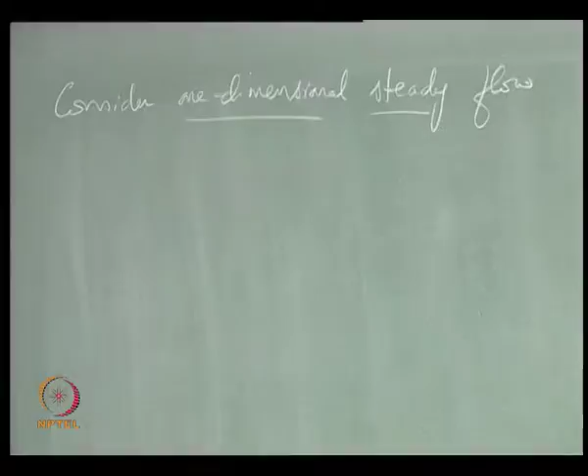So we are doing two simplifications here. One is, first of all, we are considering one dimension. The second thing that we are looking at, steady. I would like to point out that for what we are trying to do here, we don't need to make these assumptions. The final result that we are going to get should be valid for a three-dimensional unsteady flow as well. This is just to keep things simple in what we are going to do now.

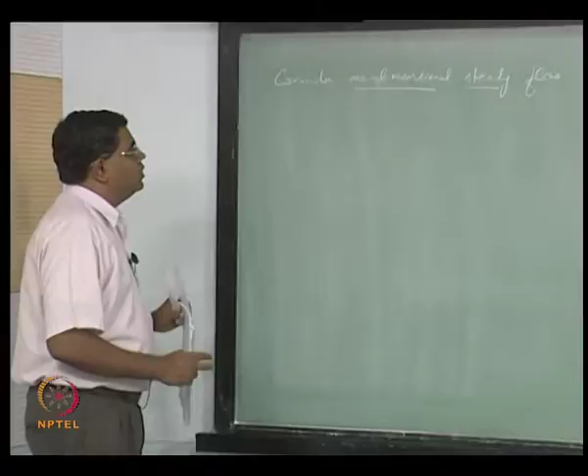What are we going to do now? Recall in what we did up until now, we wrote up the equations of conservation for combustion and found that we had 5n plus 6 equations to solve, and n was like 20, 40, whatever, so correspondingly we had a large number of equations to deal with.

So the question is, is it possible for us to, A, reduce the number of equations, and B, is it possible for us to decouple some of the equations so that it is sufficient to solve only one set of equations for doing something, another set of equations for doing something else, and these are not exactly coupled with each other, except that maybe we get solutions from one and plug into the other.

That means, as far as the second is concerned, the first solution is given to it, we do not have to solve it coupled with it, and as far as the first is concerned, we did not have to worry about the second set of equations at all and just go ahead and solve for this. So this is what is meant by decoupling sets of equations, and we will try to understand what this idea leads to in concrete terms, or in other words what decouples from what and so on at the end of what we are trying to do.

But as I said earlier, from now on all we are going to do is completely go in the direction of simplifying things, and then deal with a few simplified situations from now on. This simplification here, one dimension and steady, is to just make what we are going to do now simple, but at the end of it we are going to come up with some simplification that is valid for multi-dimensional, three-dimensional steady flows, and unsteady flows as well. So let us now look at the simplified situation.

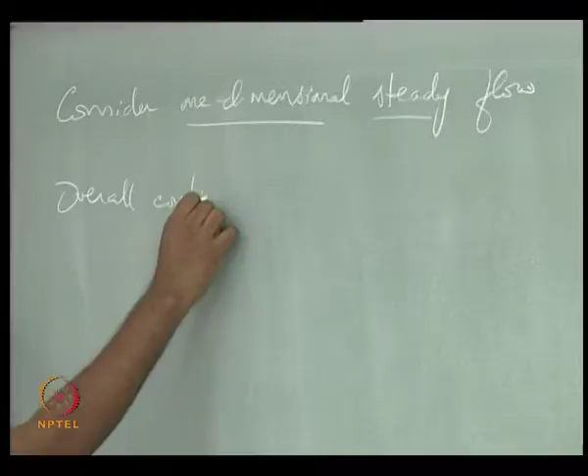If you now have the overall continuity equation, it can be integrated to give. So the overall continuity equation we had was d rho by dt plus divergence of rho v vector is equal to 0. Steady means you do not have a d rho by dt, 1D means we have a d by dx of rho u, and if that is equal to 0 we can integrate that to get rho u is equal to constant.

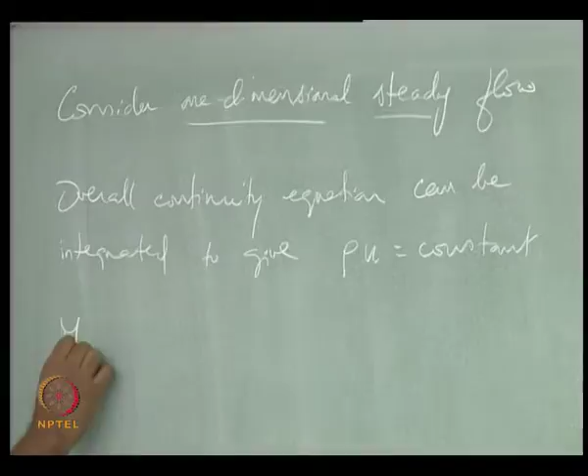So, the momentum equation for 1D steady flow, and let us also neglect body forces.

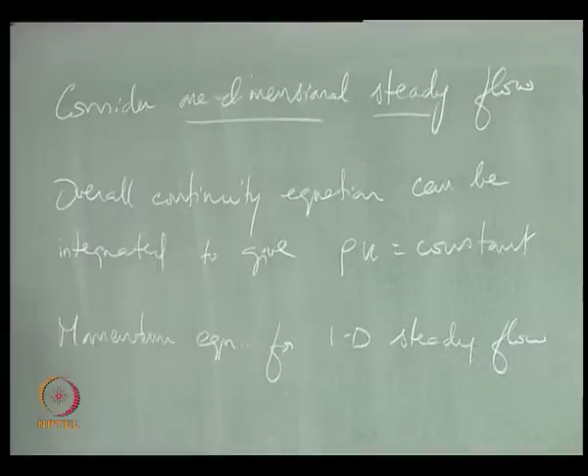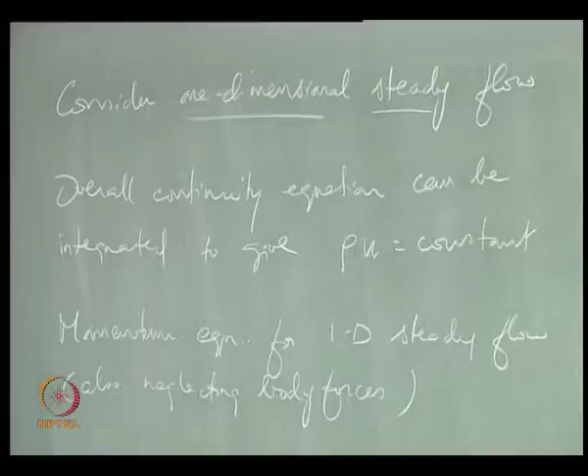Now neglecting body forces means whenever we are actually making these kinds of assumptions that let us neglect this or assume it to be negligible, we have to question it. Is it okay to neglect body forces? In combustion, one of the problems we will find about this is the body force pretty much is the one that is actually giving rise to the shape of the flame as we know it.

So if you now light up a candle, like for example you go for a candlelight dinner party with your date, and then you are trying to enjoy the moment, unfortunately then you start remembering about combustion because you have this flame, and then the entire evening is shattered. So what are you looking at there? You are now looking for a flame that is kind of elongated vertically, assuming that your date is happening in a gravitational field and you are not really going in free space.

So if you were in free space, or a zero gravity environment, you should actually look for a bulb shaped flame, whereas if you now are in a gravitational field you have a buoyancy force that is actually trying to push this flame in an elongated fashion. So the question is, is it okay?

Obviously if you neglected body forces you are not going to get flame shapes that look like anything that we are used to around here on this planet, right?

Well, the answer is maybe all that shape is not really important. For the purpose of burning the candle, it's the heat that is actually being released closest to the candle surface that really matters for melting the wax and getting the liquid to go through the capillary pores of the wick and then vaporizing to feed the flame. So we didn't have to really worry about the outer shape of the flame far away from the wax surface, the candle surface.

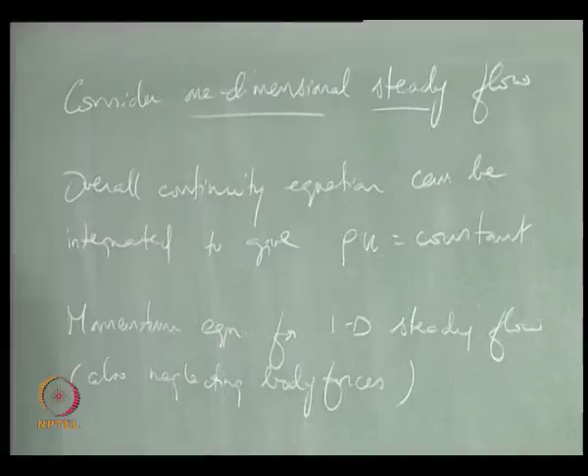So many times what you will find is it is okay to neglect the body force, not a big problem there. So if you now did that, then you get your momentum equation, which looked pretty ominous previously.

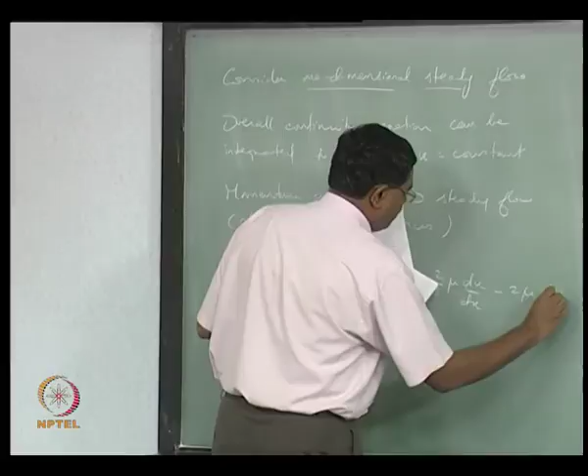It's now going to look like u du by dx equals minus 1 over rho d by dx of p plus 2 over 3 mu du over dx minus 2 mu du over dx.

Well, as we can see from what we have done even in the continuity equation, there is only one direction that we are looking at, the x direction, and we are only looking at one component of velocity, assuming it to survive, which is the x component of velocity, and that's called u.

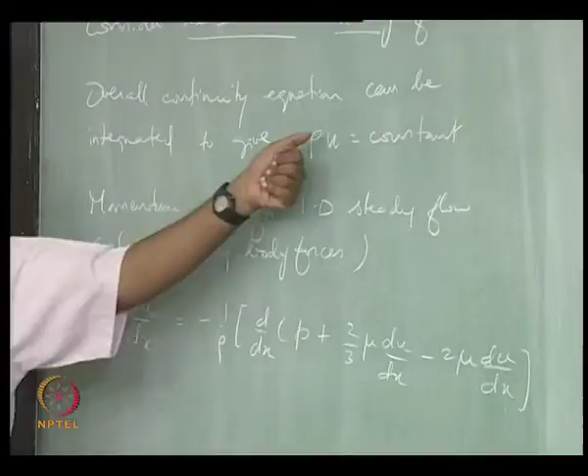And since you're looking at only one direction, it's sufficient for us to actually replace partial derivatives by ordinary derivatives with respect to x. So you have u du by dx, this is coming from the convective term, is equal to minus 1 over rho d by dx of p, that's the pressure gradient term, and then this is the bulk viscosity term, and this is the viscous shear stress term.

So these are the terms that survive. The unsteady term dropped out because we are looking at a steady flow. Pretty much all of the terms are around. Of course the body force has been neglected.

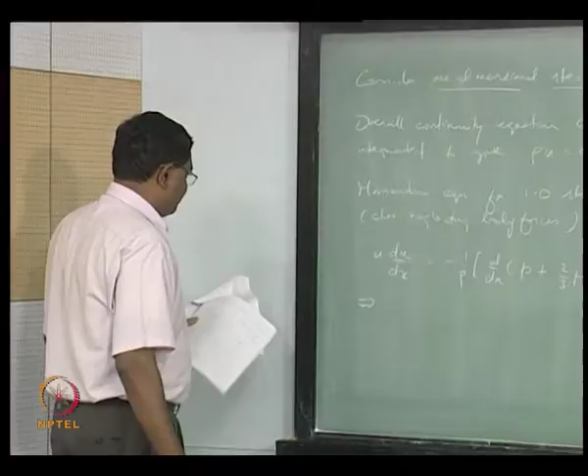So this could now be written as, if you now write this, what would I like to do if it's possible for me to write the whole thing as a derivative. What did we get over here? We had a divergence of rho v is equal to 0 for the vector form.

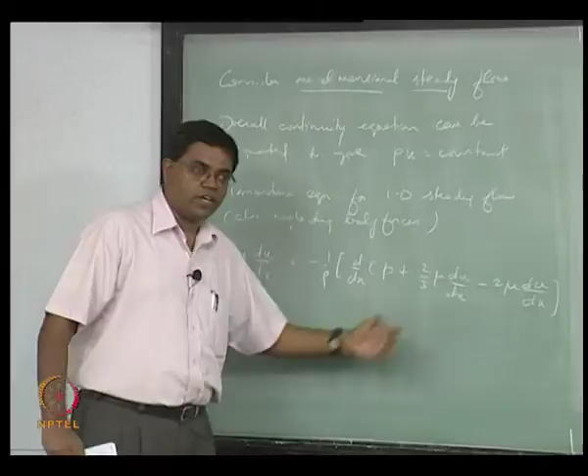In 1D we had d by dx of rho u is equal to 0. So similarly if I can actually get something like d by dx of something equal to 0, I should now be able to say that something is a constant. That's very easy for me to integrate. It becomes like an exact integral for me to evaluate.

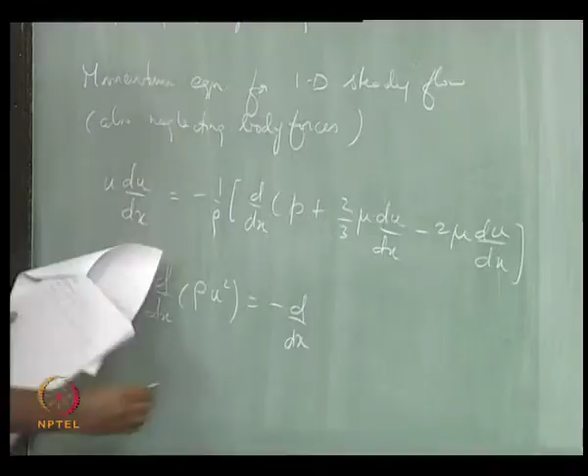Therefore we can now write this as d by dx of rho u, rho u squared, equal to minus d by dx of p plus 2 by 3 mu du over dx minus 2 mu du over dx. How did I get this?

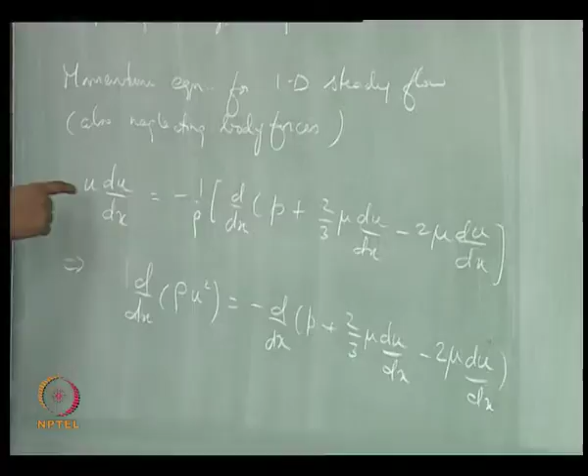Well, first of all I could take this rho to this side, and notice that rho u is equal to constant. So since rho u is equal to constant, I could actually take it inside the derivative, and there is a reason why I got a d by dx of rho u squared.

So what that means is I had a d by dx of this equal to minus d by dx of that, which means I can combine both and have one d by dx. So if I now put everything together and have a d by dx equal to 0, then whatever is inside the d by dx should be equal to a constant, which is now in our case rho u squared plus p minus 4 by 3 mu du by dx equal to a constant.

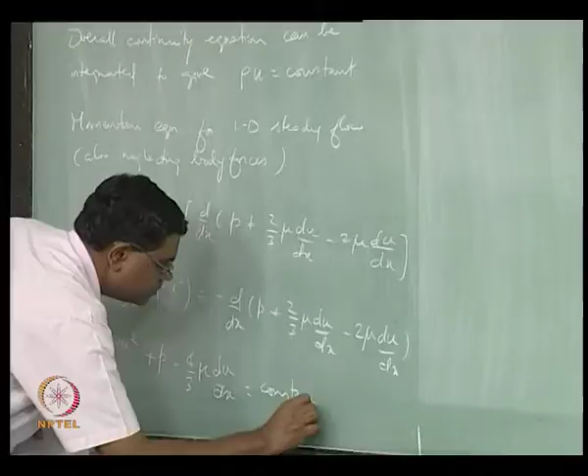Okay, we are now beginning to see things that we are somewhat familiar with from, let's say, gas dynamics.

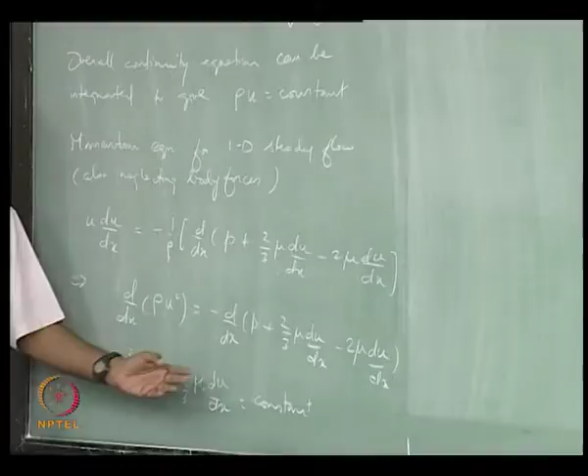Previously in gas dynamics you would have done typically inviscid flows where you had P plus rho u squared equal to a constant for compressible flows. In fact rho u equal to a constant actually comes for compressible flows. Otherwise you would have had something like, of course in quasi one dimensional situation, a rho u A is equal to constant.

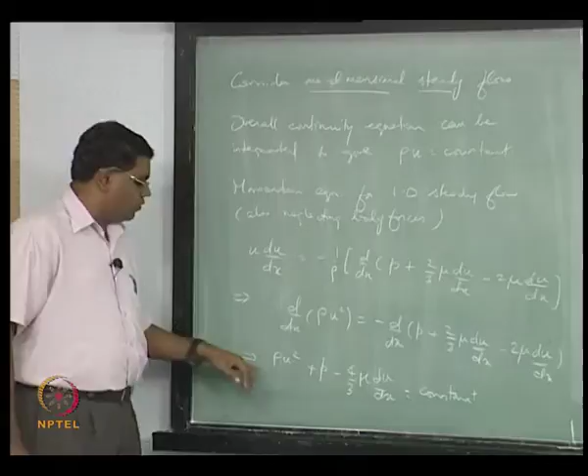This is just one dimensional, not even quasi one dimensional, so you don't worry about an area, you only worry about a mass flux, not a mass flow rate. You have to take into account the variation of rho with velocity—that means rho is varying, it is a compressible flow. That's why you have rho u squared plus p, but that's not equal to a constant like for inviscid flows, because we're still considering viscosity, so there's an extra term due to viscous effect—putting bulk viscosity and viscous shear stress together, you get a minus 4/3 mu du/dx. So previously we did not have this term, we now have this.

If you were to look at an incompressible flow, you need half rho u squared plus p equal to a constant. For Bernoulli's equation the half did not come because rho was varying. Previously if you had only incompressible flow, rho would not vary, then you'd have ua equal to a constant for a quasi 1D situation—that's what you're familiar with from the Bernoulli's equation approach. So all these things are not very different from what we've done before, maybe with the exception of this extra term.

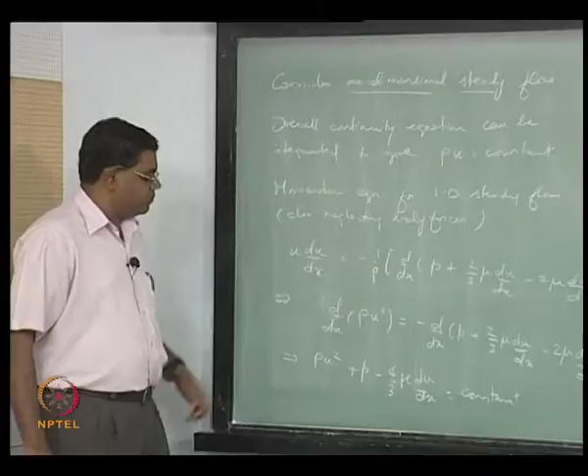Later, when we try to do detonation, we will revisit the situation and see how the flow transitions from its initial conditions to what is called the Chapman-Jouguet detonation, through many states that correspond to this.

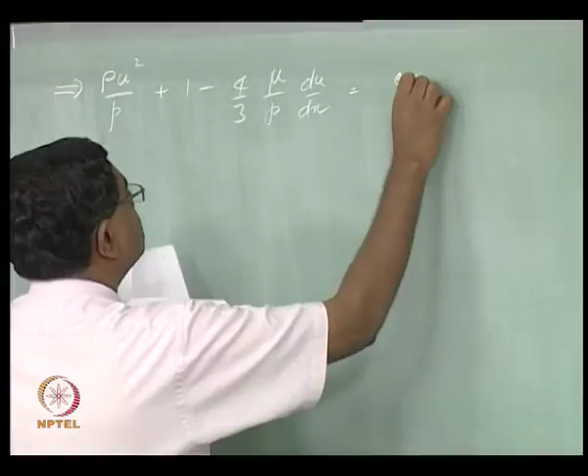What we want to do now is write this as rho u squared over p plus 1 minus 4/3 mu over p, du/dx, divided by... equal to constant over p.

Why am I doing this? The answer is I want to have a 1 in this so that I can compare the other terms relative to that—it's sort of like always making a comparison with 100%. So how many marks is this going to score with respect to 100%? 100. So 1 essentially is like a benchmark for us.

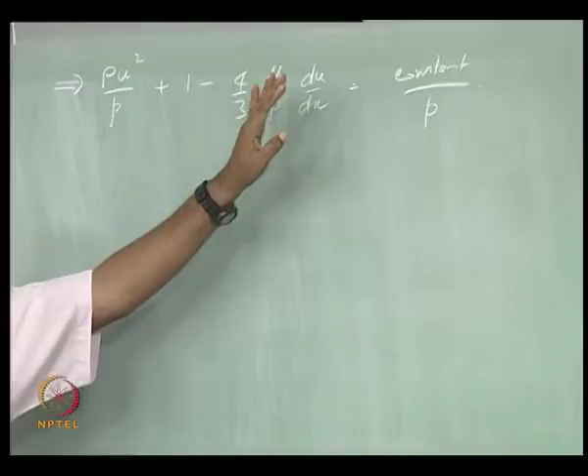So why did we choose pressure to be in the denominator and make the pressure term equal to 1? The answer is we're going to examine how this compares with 1, and see that under low Mach number conditions this is very small, and this is also very small. Small with respect to what? Small in comparison to 1—that's what we're trying to look for.

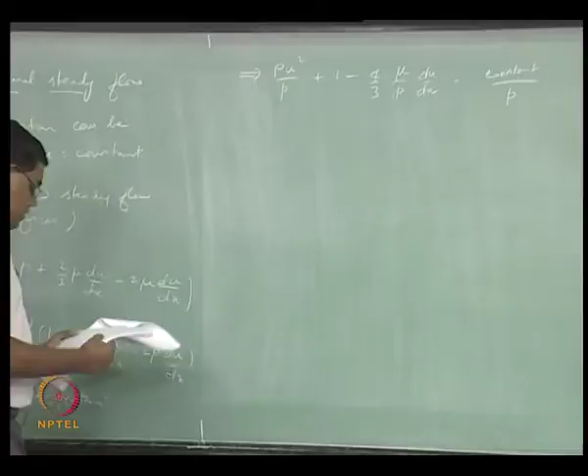So, note that P over rho equals RT, and A squared equals gamma RT, where A is the speed of sound. This implies that P over rho equals A squared over gamma, or A squared equals gamma P by rho, which is something we know. All this is for a perfect gas, of course.

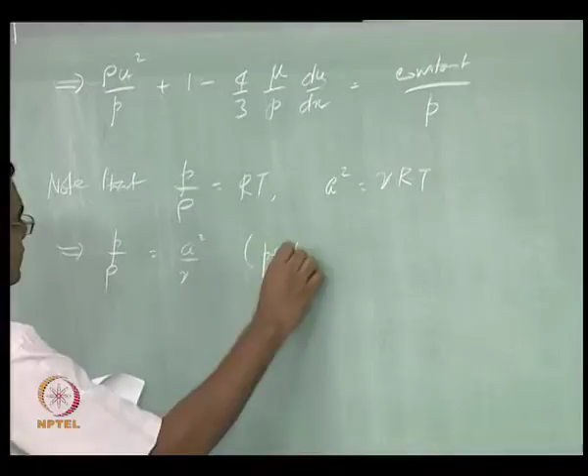Therefore, if you now plug in, P by rho would be in the denominator of this term. So u squared divided by P by rho is what we have for this term, and that would simply be u squared divided by A squared divided by gamma, which is basically gamma M squared. So u squared over P by rho is equal to gamma M squared.

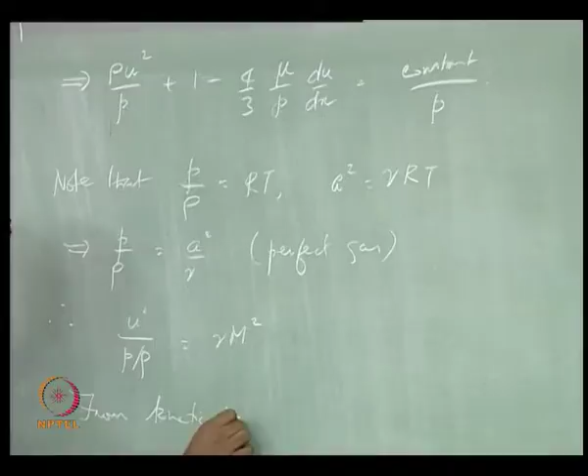Keep this with you. Let's look at the third term—the second term of course is 1, so let's look at the third term. From kinetic theory, I told you that we have to have something for mu, and mu is a transport property. Transport properties can be evaluated only if you go down to the molecular level—that means we have to go down to kinetic theory, we can't get it from continuum effect. Within the continuum framework you simply have a law that states shear stress is directly proportional to velocity gradient, and the constant of proportionality is called viscosity. That's like a law we just observe in the continuum world without knowing why.

If you want to know why, you have to get down to the molecular level, and then you will be able to find out what viscosity actually means in terms of molecular level fluid motion. If you want to know how mu depends on things like pressure, density, and temperature, typically you can try to relate it to two thermodynamic properties. What you're looking for is mainly a dependence rather than the exact expression, because we are looking at an order of magnitude approach, relative to unity, we are trying to see how this fares relative to unity.

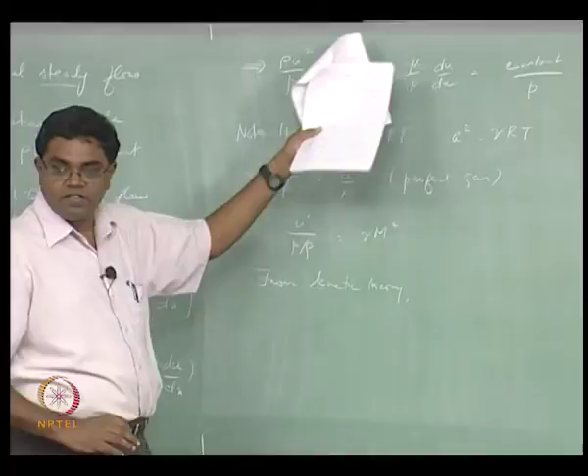So mu can be written as rho times a times lambda, where a continues to be the speed of sound. Now how did you get the speed of sound to come in for the viscosity? That's not very surprising, because if you want to actually find out what the speed of sound is, you have to get down to the molecular level as well, because it's a molecular level phenomenon that is actually propagating sound. So all these things are related.

Lambda is the mean free path. What's mean free path? Mean free path is basically the average distance covered by a molecule between successive collisions.

Now what we have to look for is du over dx, meaning we have to look at an order of magnitude of what that derivative is going to look like. If delta u is of the order of u, that means the changes in velocity are of the same order as the velocity itself. This is not to say that the changes are large, it is essentially saying that the changes are measured as appreciable fractions of the velocity. For example, if the velocity is let's say 10 meters per second...

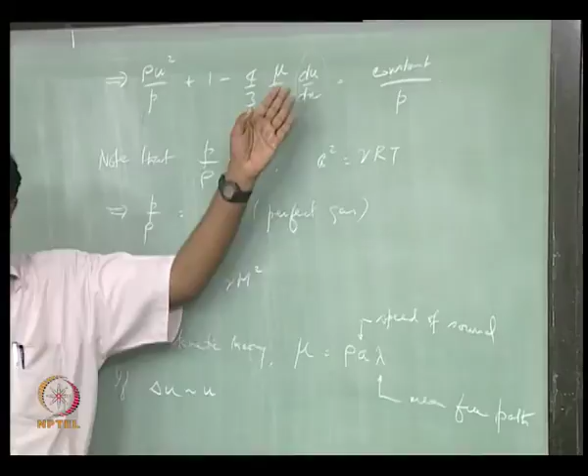And when you're now looking at du by dx, we should also start looking at what x is going to vary like. So delta x, let's suppose it goes as L. L is like a characteristic length, a characteristic dimension of the problem. We come across these kinds of things when you do things like flow past a sphere or flow through a pipe and so on, where we have characteristic dimensions, like the sphere diameter, the cylinder diameter, or the pipe diameter — these are characteristic dimensions.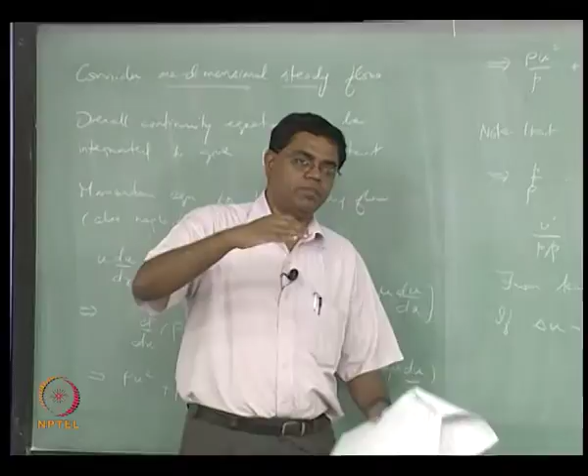So if you now have flow through a pipe and the pipe is about 50 millimeters, then you would try to actually take divisions like 1 mm apart or so. So what we're talking about as x is going to be a fraction of the characteristic dimension — we're not going to take delta x to be very much smaller compared to the characteristic dimension, it's going to be of the same order. So if you have 50 mm, we go in steps of 1 mm, which is of the order of about 0.02, still in terms of the characteristic dimensions.

For this kind of change in x — of course x is in the axial direction in this case — if you want to look at what happens in this direction, you could even do much larger steps, like every 5 millimeters. So delta x now simply becomes like 0.1 or 0.2, so you can take larger steps. And if velocity is changing, say going at 10 meters per second and changing by 1 meter per second over a 10 mm difference, then du over dx is of the order of u by L. That's essentially what you're saying.

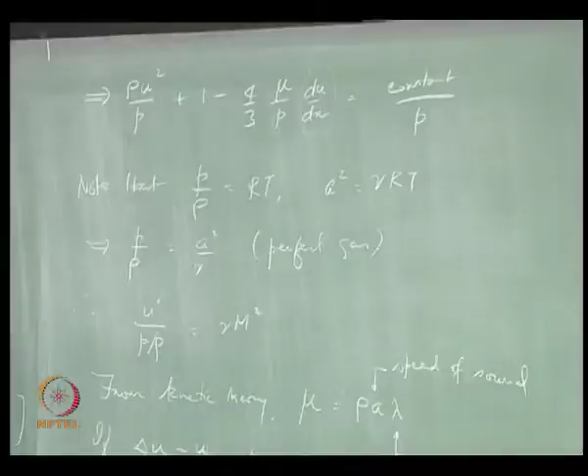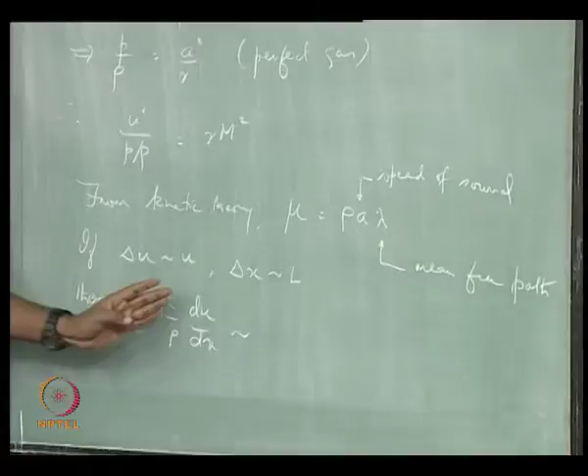So then 4/3 mu over p, du by dx now goes as... let's forget about 4/3, it's not very different from 1, okay. Now this is some new math, yeah? Where we kind of cheat on these things — when you're in 4th standard you really start mugging about decimal places, and as you grow older you become a lot more scrupulous about 8 decimal places accuracy. But then finally you come to graduate school and we say 1.33 is the same as 1, forget about these 2 decimal places and all.

Oh, come on, is this why we studied so hard?

Okay, that's exactly what is meant by order of magnitude. So let's not worry about the 4/3. If you want to keep it, keep it, don't worry about keeping it or leaving it. So then mu goes as rho a lambda, keep it as p here, and as I tried to belabor the point, delta u over delta x is like u over L, right, and we should now know how to rearrange this.

You can get the rho down here, so as p by rho, and then we now notice that p by rho is a squared by gamma, so I can now plug in a squared by gamma over here without the rho there, and then the a gets cancelled, the gamma goes to the top, and then you have a over here at the bottom, there is no a at the top anymore, but u and a get together to make an m, and lambda and L get together to make what?

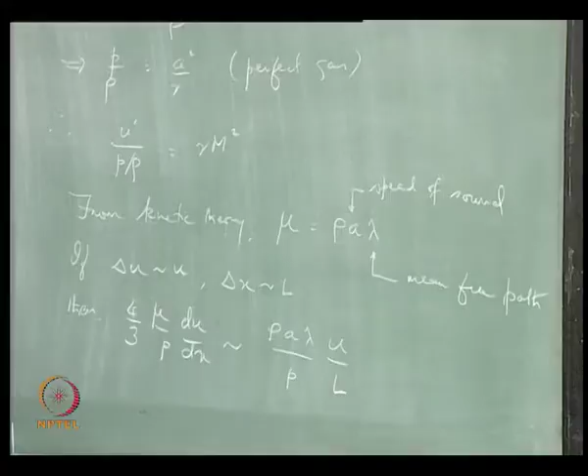So the mean free path relative to the characteristic dimensions of your problem is something you come across the first time when you do fluid mechanics, typically when you're convinced, or rather brainwashed into thinking that we will have a continuum approach, which can be justified by looking at something called a Knudsen number, which is very small for typical situations like the kind of flow that we have in this room, atmospheric pressure, room temperature, the air is so densely packed when compared to the mean free path.

Let's say you're now looking at flow past this table, that's like billions of mean free paths there. So this together gives you the Knudsen number.

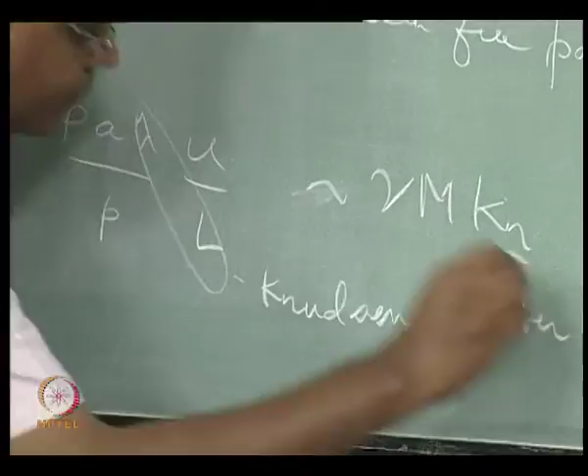And as I said, you can get a gamma m from the other part. So this is actually going to give you a gamma m Knudsen, if you want me to write what this is, that is Knudsen number Kn, and for typical continuum applications Kn is very small, like 0.001, 0.0001, whatever, a very small number, 10 to the minus 3.

So now Kn is very small for continuum flows.

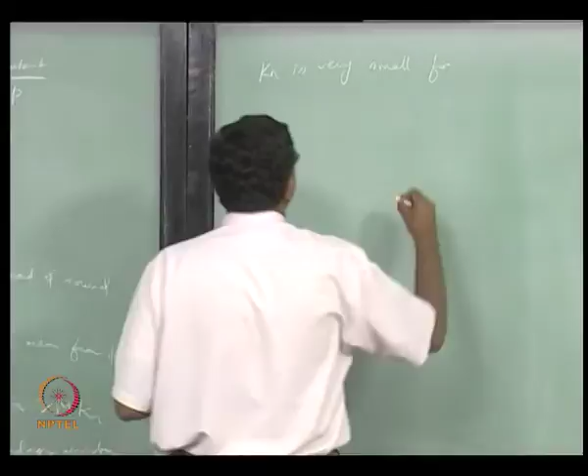Then the question that you ask is, wait a minute, we are doing combustion, is combustion continuum flow? Didn't we start talking about molecules colliding with each other and reacting, and then you even talked about the molecules needing to be exactly oriented so that you have effective collisions, and then you will have chemical reactions for some atoms on some parts of the molecule with some other atoms in other parts of the molecule and all that stuff. Weren't we talking about all those things at the molecular level? Why are we now suddenly saying continuum?

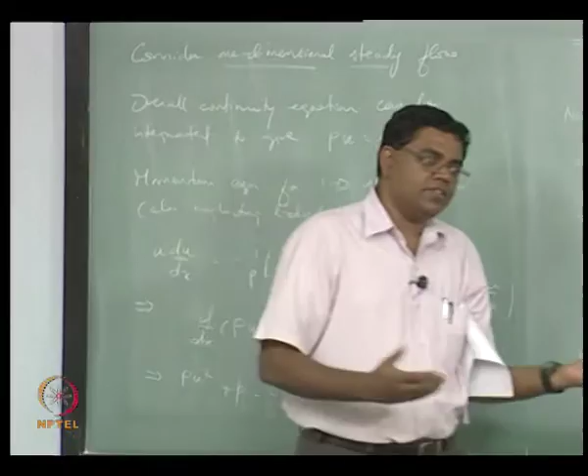Continuum doesn't mean that there aren't molecules. So the fact that we have to actually use the law of mass action and the Arrhenius law is because we are actually looking for a continuum representation of those chemical reactions. The fact that we are able to define a concentration of a species at a particular point, which actually contains billions of molecules of all the species at that point, means that we are actually dealing with continuum.

So even though the chemical reactions are happening at the molecular level, it is happening at a point where you are looking at millions or billions of molecules of lots of species, with each of them being represented by a concentration at that point. Concentration means you need to have a certain mass for that given volume at that little point, or a certain number of moles for a given volume at that particular point. So that point has a little volume and a mass associated with it, and the point we are talking about is like a mathematical point in space where your chemical reactions are happening.

Now it is not like it is happening in this room or things are happening the size of this room. You have to imagine a flame that you encounter, like a Bunsen burner flame that is a millimeter thick or even smaller. You should be able to pick a point within that flame, and at that particular point you have all these chemical species with their concentrations and so on. So it is a continuum flow, that is not a problem at all.

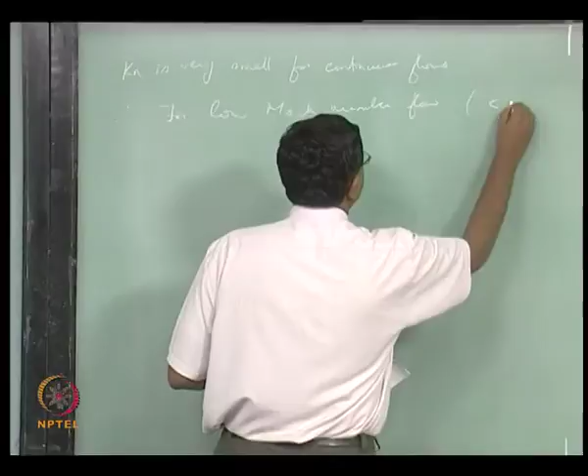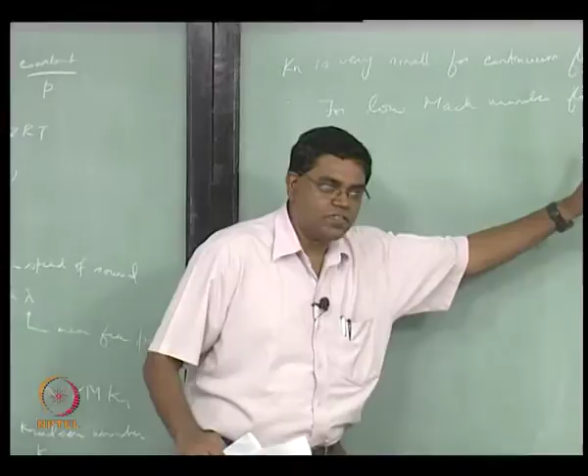So we are now talking about low Mach numbers, less than 0.1. And that is not a magic number, it is not a God-given number. If it is 0.11, don't start shivering. If it's 0.09, don't feel a huge relief or something of that sort, nothing like that. It's just quite low when compared to 1.

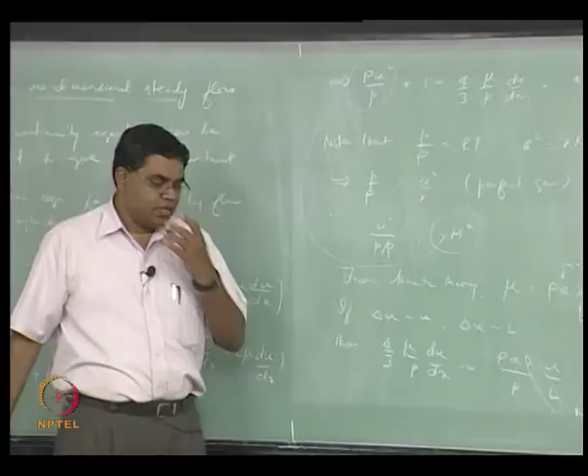And then what do we have? We now have this term which begins to look like this: if m were like 0.1, m squared is like 0.01, and Knudsen number is already like 0.01 or less, and m is again 0.1, so this term is going to be much smaller. So both rho u squared over p, and 4 over 3 mu over p du over dx, are much smaller compared to 1. That means in this equation we should try to get rid of this, and we are left with only 1. We got rid of these because they were very small compared to 1, so we keep the 1.

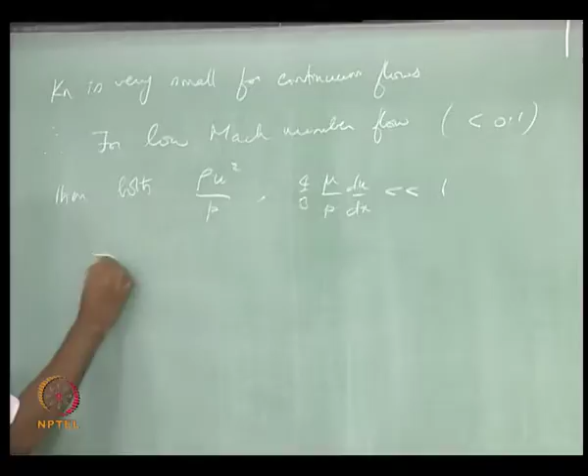So we now keep 1, and what do we have on the right hand side? We say 1 is of the order of constant divided by pressure, meaning pressure is approximately constant. So this simply means P is approximately a constant. What have we done? We have practically shattered the momentum equation down to a P equal to constant equation. We started with a momentum equation and systematically dismantled the momentum empire, if you will, to get it down to a teeny weeny equation that is just P approximately equal to a constant. Is that okay? Does it make sense?

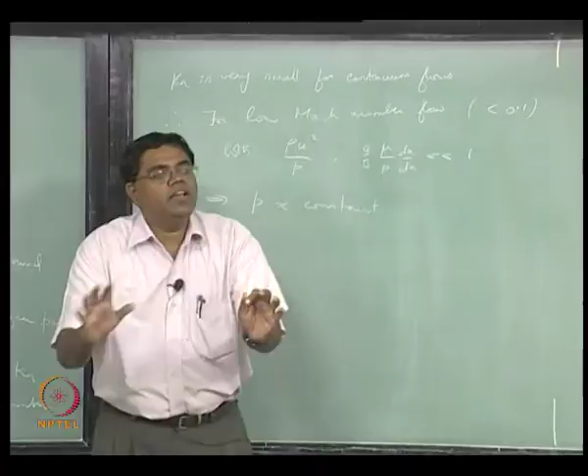So you light up a Bunsen flame. Do you feel a pressure around? You go to your kitchen gas stove and light it up. Do you feel a pressure around? You don't really feel a lot of pressure around, it is just approximately constant atmospheric pressure there. That's all right, but what about a gas turbine? That's really going at very high speeds. I'm pretty sure there must be a lot of pressure. Yeah, the pressure is high, but it is approximately a constant.

Right, so we are talking about fairly low subsonic combustion happening roughly at a constant pressure.

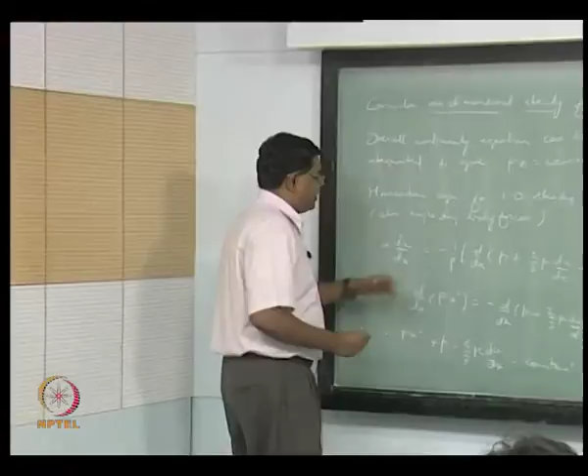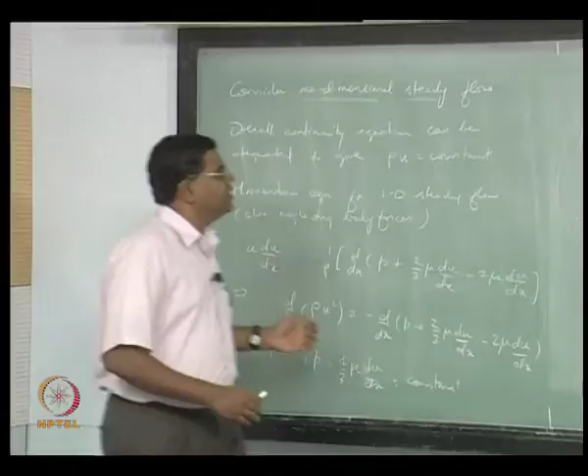Whenever we look at these kinds of things, neglecting body forces, assuming continuum, and looking for low Mach numbers, we don't necessarily have to think combustion. If you had a non-reacting single species flow, like ordinary fluid mechanics, we could say let's not worry about body forces, that's okay. In fact, in combustion we had to worry about body forces and then neglect them. And it's continuum flow, so the Knudsen number is quite small, and we're thinking about low Mach number fluid mechanics anyway. So all these assumptions we're making along the way are satisfied for a normal fluid mechanics flow.

We should now be able to reduce our momentum equation down to P equals a constant. Why are we stuck with a momentum equation that we've not been able to solve for 300 years when it should just be said as P is equal to a constant? Are we getting any information here?

The answer is, let me think about it. You just have a piece of pipe, let's say a small piece of pipe, and then you blow through this pipe, and of course you can play with this, and put your hand on the other side and feel the cool air coming out because you're blowing. Of course you don't really get a lot of pressure out there, so it's all approximately atmospheric pressure. That's really the key - how much did you blow with, right?

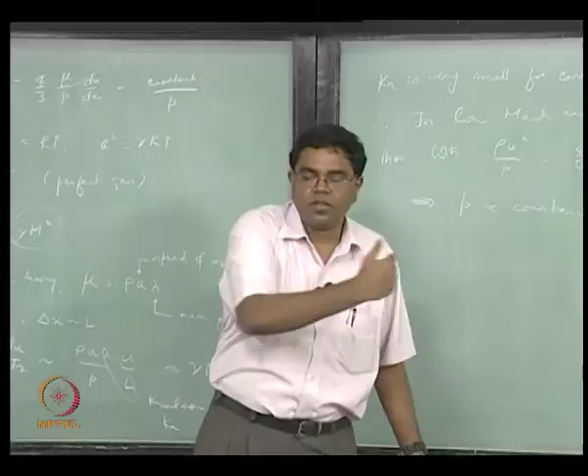The answer is a little bit more than atmospheric pressure, therefore you could actually get the flow out to atmospheric pressure. So the delta P we're talking about is very, very small, so that this flow field is approximately at constant pressure, but there was a small pressure gradient required to drive the flow. This is what we're talking about for these kinds of low Mach number flows. So this is not to say that the pressure gradient doesn't exist - it's quite small, and that's good enough to actually drive a low Mach number flow.

As a matter of fact, in a gas turbine with all the complicated machinery, like swirlers and a flare and a sudden expansion and all these things, you're expected not to have a pressure drop of more than 5%. If you have a gas turbine with a pressure drop of more than 5%, it's a bad design - you try to get it up to 95% pressure recovery. So you're not looking at a very huge change in the pressure at all for all this big flow we're talking about.

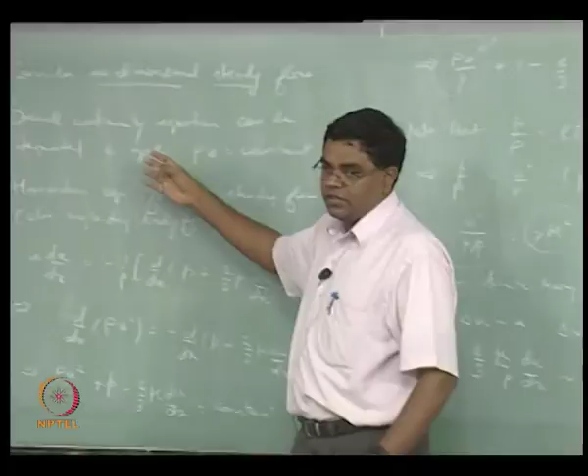So this for us does not mean that the momentum equation is gone. The momentum equation is still required for you to get the flow field, except the momentum equation now gets decoupled from the species equation and the energy equation. This is what it really means - we are starting out with the overall continuity and the momentum together. They constitute what is called the flow problem.

If you now had the flow solved for, that is basically cold flow - you're given a very complicated geometry with a pre-diffuser, a dump diffuser which is highly curved, and then you have the swirler and atomizer coming through, and liner pores, and a flare, and secondary holes, and dilution holes, and a liner flow, and there's a casing around, and you have combustion going on inside. Don't worry about all that stuff - just take this geometry and do a cold flow. Work out the flow field in this.

That means you now take your incompressible equation set for fluid mechanics, namely the continuity equation and the momentum equation, solve for the flow field, and you get your velocities.

These velocities now can be plugged into your species equation and your energy equation. That means we now want to worry about the combustion problem as constituted by only the species equation and the energy equation. In other words, we want to split the set of equations into a flow problem that you solve independent of the combustion problem, get the flow field, and plug it into the combustion problem.

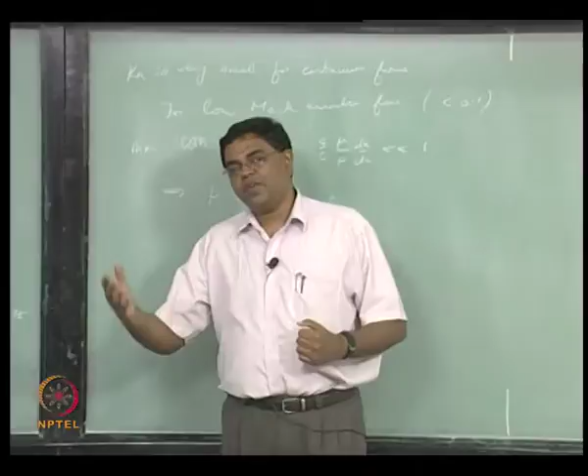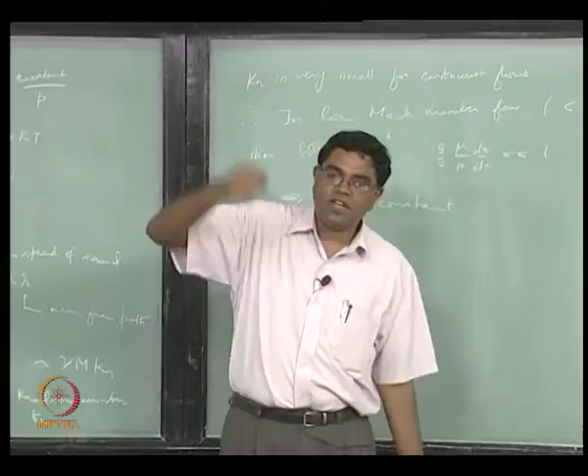And that also simplifies your species and energy conservation, because you are now looking at V dot del yi and V dot del T kind of terms. If you have only one dimensional velocity, that means velocity in only one direction, it simply reduces to u dou yi by dou x and u dou T by dou x. You do not have a v term at all, so the lateral convection term gets absent, so you do not have to worry about it.

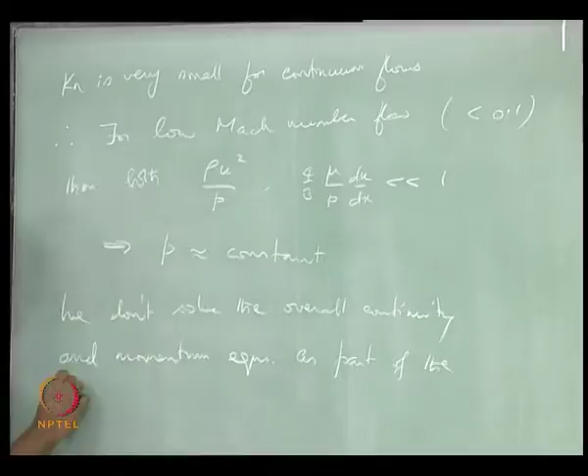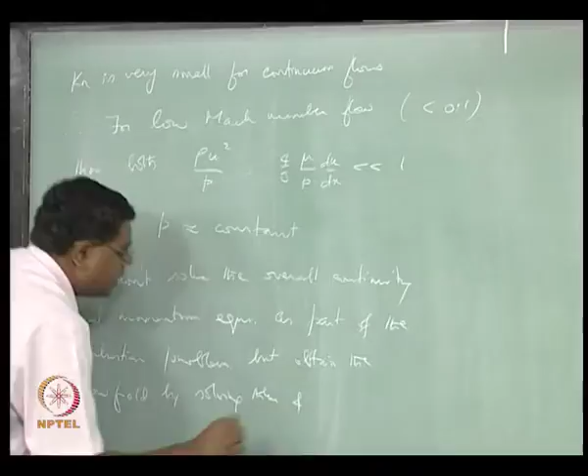So this simply means that we do not solve the overall continuity and momentum equations as part of the combustion problem, but obtain the flow field by solving them and use it as prescribed in the combustion problem.

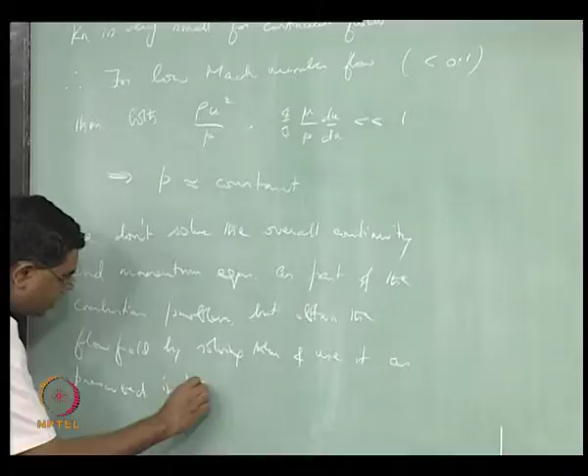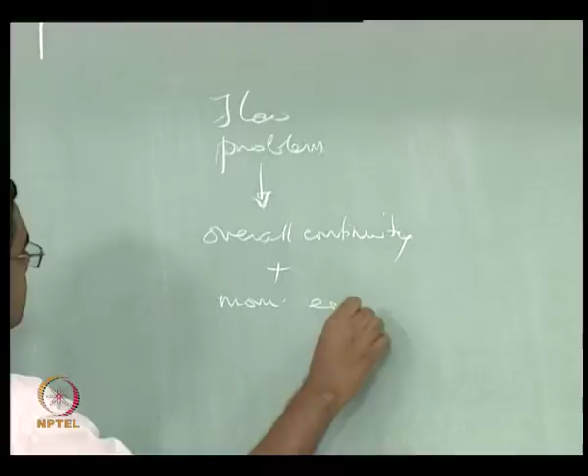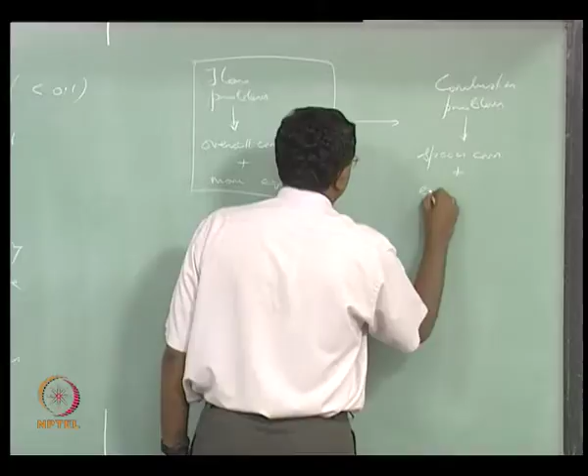So what is meant by the flow problem then is overall continuity plus momentum equation. And then we have the combustion problem, which is the species conservation and energy equation.

So when you now say this arrow, that means flow field prescribed. So many times that means we do not even care to solve the momentum equation or the flow problem, you just take a flow field that is prescribed as far as the combustion problem is concerned.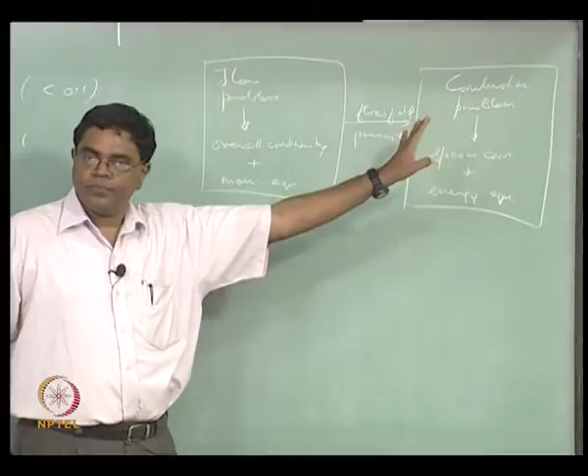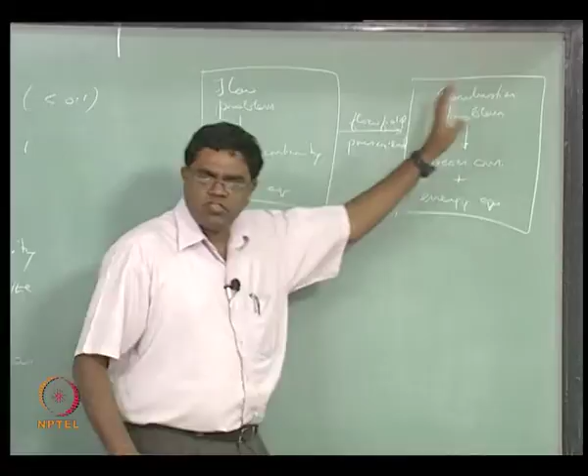Now I do not know how many of you are really thinking about this as well as we should. What do you mean by saying I prescribe the flow field and then the convection of species and enthalpy is going to happen as prescribed? The question that you have to ask is, doesn't this affect the flow field back? Shouldn't we have an arrow backwards? Well, I would like to say two things here.

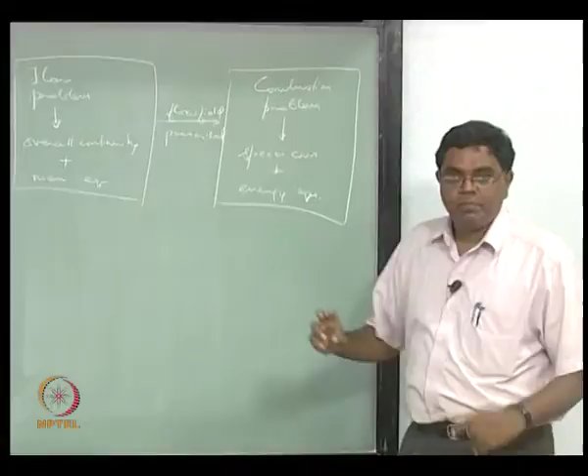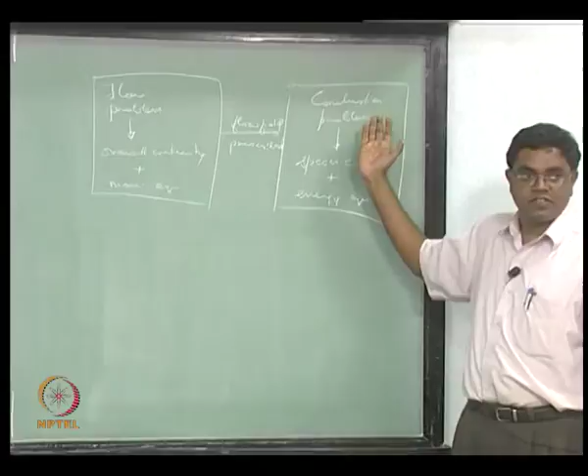One, if you were to have an arrow backwards, still be happy that I could draw these boxes separately and identify a flow problem different from the combustion problem, and then have an interaction that is explicitly understood between these two, as opposed to putting one big box for all the equations and saying that's it, you have to solve all of them all the time. I am still thinking about decoupling these problems. That means my solution procedure for this may be different from the solution procedure for this. This one contains all these bad terms like the chemical reaction terms and all those things. So I may have to have a solution procedure that is different for this than this. So it still makes sense for me to think about these as two distinct problems even if they have a two-way interaction. But what I have now talked about is only one-way interaction.

But shouldn't you really have a two-way interaction? That means shouldn't the combustion actually affect the flow field?

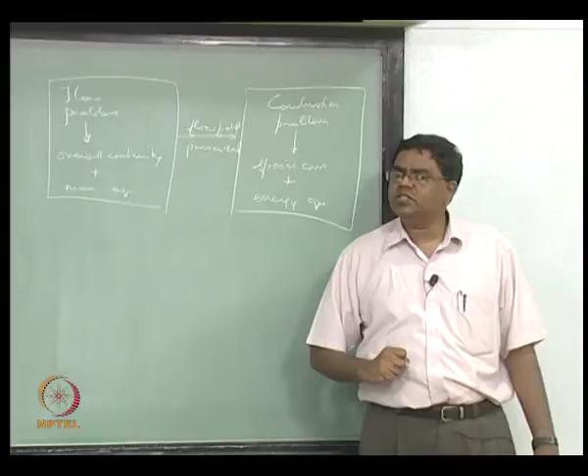Why would it? Yeah, of course it will. If you now think about a candle flame...

Let us light up a candle, and assuming we are thick skinned, which I am, I now take my finger very close to the flame, but somewhere near the bottom. Let us suppose this is the flame — it's a big, exaggerated view here. The flame isn't so big, but I take my finger somewhere here.

Of course I am beginning to feel the heat, but I don't really sense a draft, I don't sense a flow. But when I now try to take my hand somewhere there, do I sense something? You now see a flow, you have a flow.

Of course you might claim that's because of buoyancy, or the hot gases rising up. But I can claim that if I were to actually go into free space or zero gravity, I should now have a flow that is set up radially outward instead of going up, because we are not in the gravitational field. Still I am going to have a flow, which is not the same as having still air at the bottom.

If you now have a flow going through a flame, for the reactants the temperature is low, so the density is high. But once it gets past the flame and becomes products, the temperature is now high, so the density, for more or less constant pressure, is now going to be low.

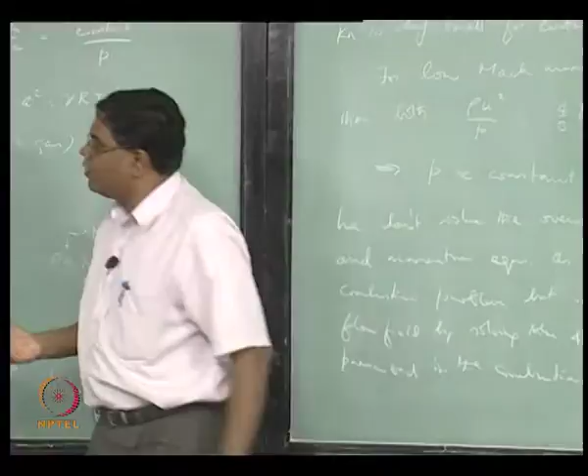So what does a low density mean as far as the velocity is concerned? If rho times u equals constant, the velocity is now going to go up.

So sure enough, if you think about a Bunsen flame, you have a cold flow coming in — this is like a blue flame — but then the flow actually enlarges and goes up faster than it came in, into this flame.

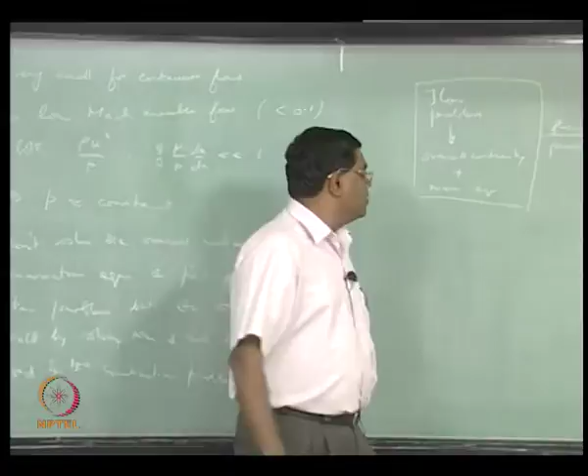So the temperature effect on density has the effect of dilating the flow once it goes through the flame, which in turn means the flame affects the flow, or the combustion problem affects the flow problem through the density depending upon temperature. So you do have an effect — this is because rho goes as 1 over T.

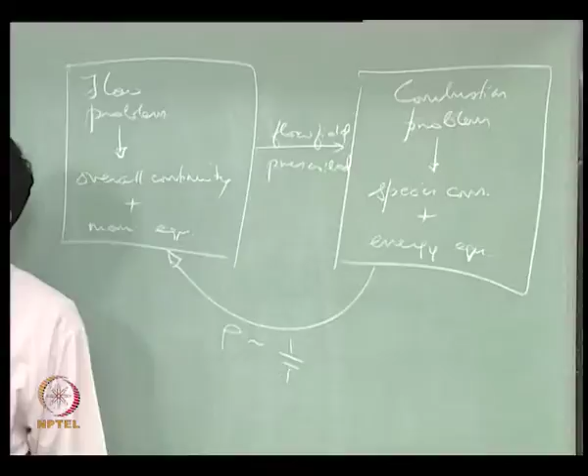I say 1 over T because we still assume P is approximately constant. P equals rho R T, and P is more or less constant, therefore rho should actually decrease just as the temperature increases. To give you an idea of these numbers, think about a reactant entering a flame zone or combustion zone at, say, 300 K.

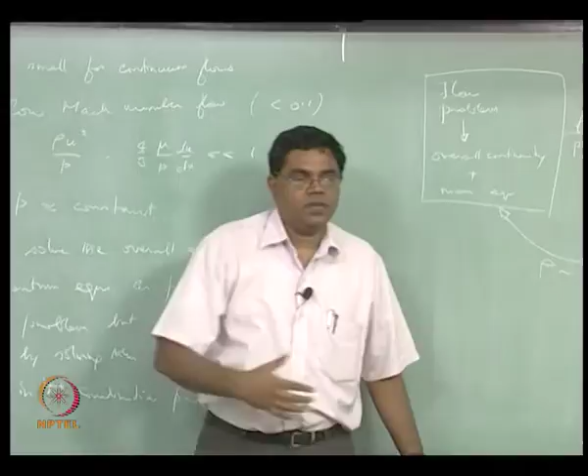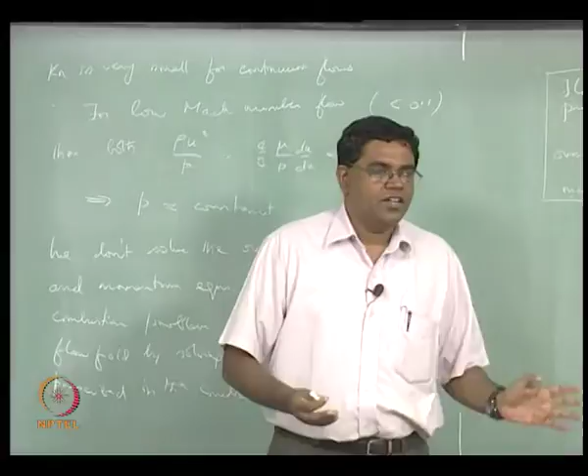And then it gets out at, let's say, something divisible by 3 to make life simpler — 2400 K, that's more like it. Of course you could have taken 2100 K or 3000, but we are now talking about a ratio of about 8, anywhere between 7 to 8 to 9.

So we are looking at a ratio of about 8 times jump in temperature for typical hydrocarbons, and therefore the density should decrease so much more, and the velocity then increases so much more. But the Mach number doesn't change a whole lot — the velocity increases, but because the temperature went up, the Mach number came down.

So that's not a problem — you're still going to have P approximately equal to constant, but now you have a high velocity there. So it's possible to take this into account, go back and alter the flow, prescribe a new velocity field into the combustion problem, find out how the combustion changes the temperature field and therefore the density field and therefore the flow field, and so on. But still this means we can decouple the two problems and solve them with different strategies, while taking into account this coupling.